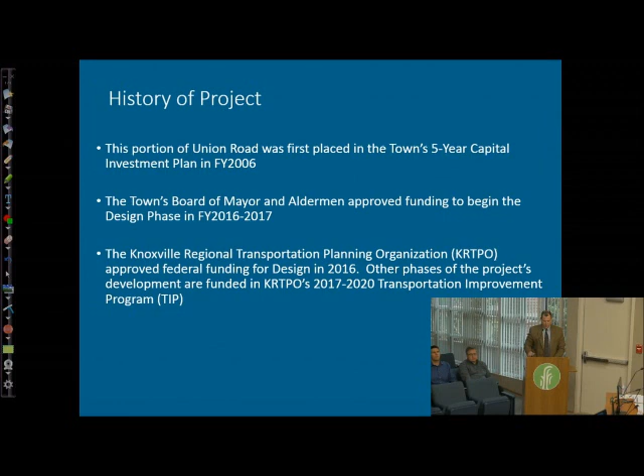Back in 2016-17 with engineering, we were able to get grant funding through the state of Tennessee and the Transportation Planning Organization, where we have an 80-20 split on the money that we get. That was a real benefit to help us afford this project going forward. The project runs from Everett Road all the way down to Hobbs Road along Union, and then down to Kingston Pike, almost 4,400 feet of improvements to the roadway.

We have a few pictures to show the current conditions of Union Road. This is roughly a 15-foot wide road throughout this entire area, and there is no pedestrian access or facilities along the roadway.

So why did we need to improve it? We know that the volumes of traffic along this road are going to be far greater than they are today. We've got a couple of developments going on right along this stretch of roadway, and we needed to try to get the improvements done as concurrently as we could with those developments.

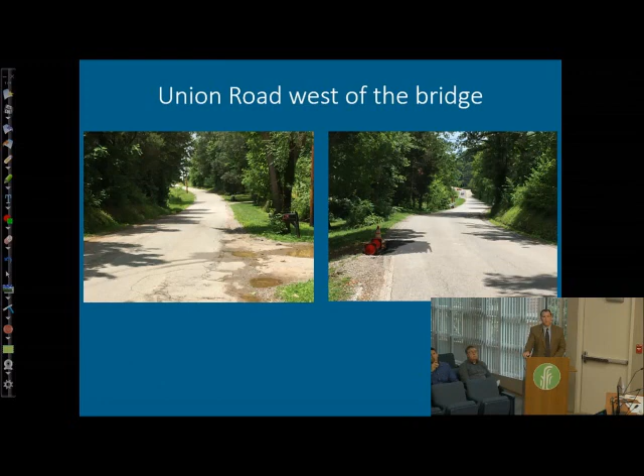When we first start looking at projects and how we're going to design them, we look at several different manuals, guides, and things that we have as a town, as well as things that the state of Tennessee requires. We have to marry all those things together and work through the guidelines to make sure that when we improve roads, it's not just for motorists, but also for pedestrians and bicyclists.

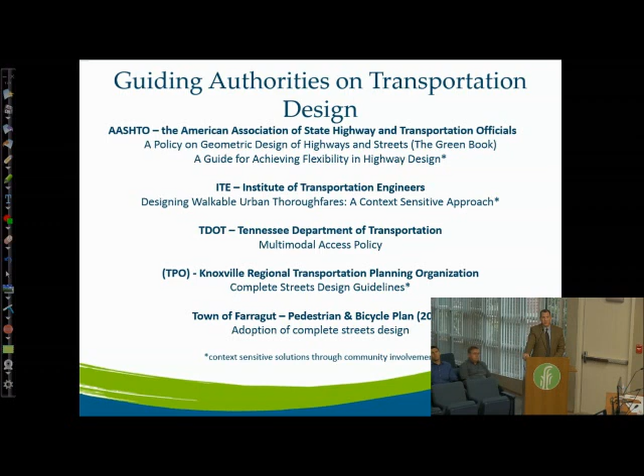The town has had a long-standing policy dating back to 1997 with the pedestrian circulation plan, where we try to put trails in with road improvements. Then back in 2010, with the bicycle and pedestrian plan, we also included complete streets—you'll hear a lot about complete streets from different organizations. Basically, that means we not just have roads, but also multimodal access, so people walking, running, or biking can get through the same area.

One of the most recent projects that meets this multimodal design approach is Old Stage Road, from Watt Road going down to where it extends further into Old Stage toward the Fort West subdivision. That project had not only wider roads with 12-foot lanes, but also 4-foot bike lanes and 5-foot sidewalks on both sides, allowing for multimodal transportation along that section of corridor.

One of the things we wanted to do early on was talk to residents about what they wanted to see for this corridor. We had a first meeting back in March of 2017 with residents in the area to get some feedback. One thing we heard was that they didn't want a highway or a speed zone out there—they wanted to try to slow traffic down if at all possible. So how could we design things to slow traffic down?

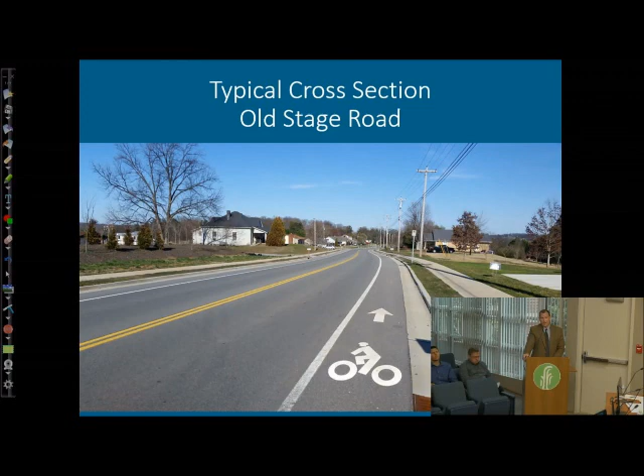One of the first things we did was request design exceptions from the Tennessee Department of Transportation in order to try to do just that. One of those design exceptions was to add roundabouts, if possible, in the design. The other was to get a design speed lower than what they would typically allow, down to 30 miles an hour. They were agreeable to both of those things.

Originally, back in November of last year, we had designed three roundabouts along this corridor at various entrances to the subdivisions. After public comment over about a 3 or 4 week period, we realized that the two entrances at the current subdivisions of Fox Run and Saddle Ridge were not desirable or wanted by those residents. So we were able to take those out and make it more of a regular road-widening type of project, but we did keep the roundabout at the new entrance to where the future Ivy subdivision is going to be.

One of the things we needed to do to allow for the multimodal aspect is put a trail or multimodal path on one side of the road. We were looking at a 10-foot trail on the north side of the road along the entire stretch. There's also a grass strip we're trying to have—town standards are 6 feet, but we're looking to adjust that and make it wider where possible so street trees can be planted and hopefully live longer. With a wider grass strip, we think more of these trees will survive long term and grow into nice specimens someday.

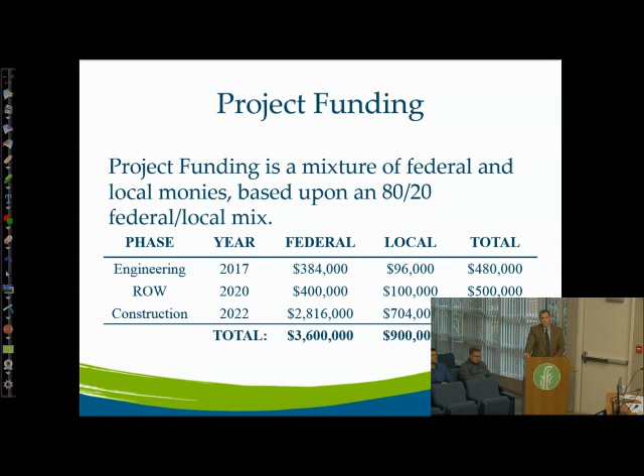For the project timeline, we're in the engineering phase right now, technically in what's called the NEPA phase, an environmental review phase. NEPA takes quite a bit of time—about 36 months start to finish—and we're a little over halfway through that point right now. About a year from now, once we get approval from all the bodies, not only Planning Commission but TDOT, we can start final design and eventually start buying right-of-way. Once all the right-of-way and easements are purchased, construction will take 14 to 18 months. That gives you a broad timeline of when we think these things could be done.

Tonight, what we're looking for is really the MPC's direction on any changes you'd like to see, or any adjustments or tweaks to the project. We feel like everything you're going to see in the plans tonight meets TDOT's expectations of what we need.

There is one thing we're slightly concerned about: some sections of the trail and multimodal path are going to be right up against the roadway. TDOT came out back in February with a more detailed multimodal transportation plan guide. One of the things they talk about is that if you have a trail next to the road, it may require a barrier of some kind. What we're trying to avoid, if at all possible, is any kind of guardrail or concrete barrier along that roadway. That may be something we have to look into and try to get with them on to see what the possibilities may be.

So with that, I will end my presentation, and we'll be happy to answer questions later. Thank you.

Darrell, do you have anything at this time? I really have nothing to add unless you have questions. Okay.

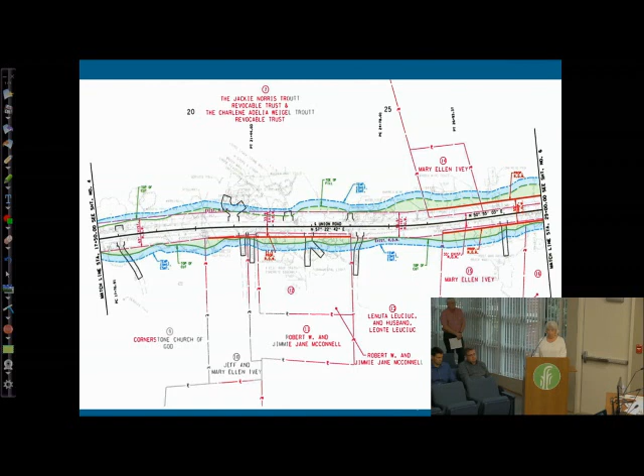The town's goals can be met without the extreme design. Every existing property owner that chose to live, buy, or build here around Union Road did so for their own personal reasons. While we appreciate the town's vision for new, undeveloped land, the existing property owners impacted that have lived here and made a living here, including my husband and I, even before there was a town of Farragut, have rights and wishes that need to be considered.

The town represents them also and needs to advocate for their rights and keep the impact as minimum as possible in their future development and visions. Future development and visions need to be balanced and respect shown to the current property owners. A lot of people chose to live on or off of Union Road because they loved the area as it is, not for future visions. Thank you.

Okay, Tim Sayers. Good evening. Tim Sayers, 12812 Pecos Road. I'm here for 2 reasons about Union Road. One is my own personal interest, and the other is to help support our neighbors, the Trouts, who have been wonderful neighbors to Saddle Ridge neighborhood, and I think we owe our support to them for that.

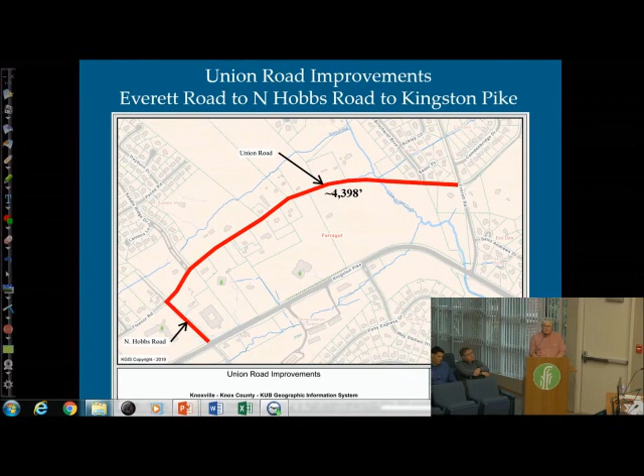I'd also like to ask that you look at the design of the multi-purpose path as it runs in front of the Fox Run neighborhood, particularly right in front of the corner property, the Blatts that live on the corner there. As that path runs along the road, it does run right next to the road right at the entrance. I'd like to see us make sure that path stays along the road until we get to the corner stake, the back left corner stake of the Blatts property. Otherwise, that multi-purpose path and the grassy strip or whatever will be right up against their fence line or their property line, allowing people walking along that strip to look right into their backyard.

So if you could keep that thing tucked in a little closer to the road, for just maybe 10 or 15, 20 feet more, whatever it takes to get to that corner stake, and then you can gradually move back out.

Also, I'd like to mention that in the response to the comments that were made, there was some discussion about stop signs, and I'm still not clear as to what the vehicle count is and what the requirements are for stop signs.

I'm definitely concerned at the entrance of Fox Run, if the vehicle count is going to increase like it's projected, that in the very near future, perhaps right at the end of that project, we're going to be needing a three-way stop at that entrance. So I would like more detail on what qualifies for a three-way stop there.

Certainly they're effective, somewhat effective, on Smith Road, in at least slowing people down. I've seen people run through those stop signs as well, but at least they slow down. So there's definitely some benefit there.

The last thing I want to mention is I would appreciate if the town, when the construction is going on, would work with the HOA board, which I'm a member of at Fox Run, because we want that island that is now designed in the front to be plantable, not concrete, with low bushes or hedges. Perhaps our board would consider allowing an irrigation line to run across or under the road from our irrigation system that's right there, so that we can keep that plantable island in front of the entrance of Fox Run irrigated, so those bushes can survive.

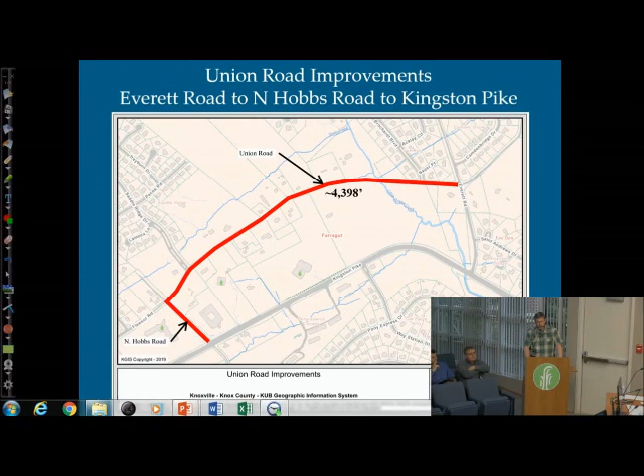And I would challenge any of you to go out and wonder why no one walks on Everett Road. If you would go out there and walk on Everett Road, it's often 50, 60 miles an hour. And so if that's your plan for Union Road, no one wants it. No one wants an interstate running through the country. No one does. So there's much more work to be done

on these design plans. So I have a specific question for the town administrators and the engineers as to how they determine that Union Road is a major collector road versus being a local rural road, because those design requirements are very different if you look at it as a major collector, as opposed to local rural traffic.

And if I can, Mr. Whiting, it'd be great, we could get you a cup of coffee. This is an important meeting. I've had many sleepless nights. I would appreciate it, as I'm sure everyone else would, if you could stay awake and listen to our comments. It's important. So I'm finished. Thank you.

Okay, then Melissa Bowles. Melissa Bowles, live at 12608 Union Road, which is right on the very corner of Everett and Union.

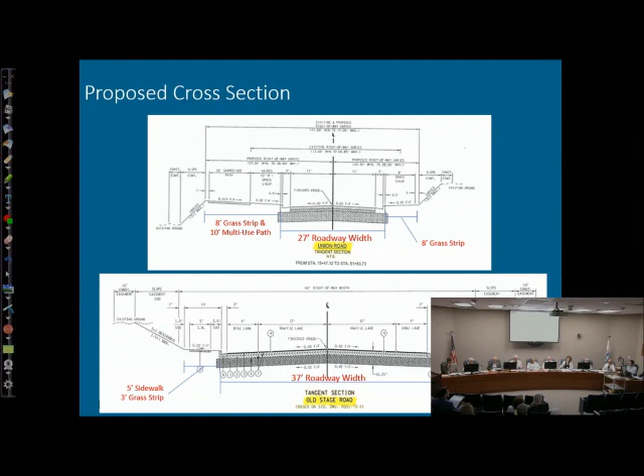Well, that's important to me because I've heard residents mention several times their aversion to not wanting Everett Road. So I'm trying to get in my mind, and it sounds like, especially if we put trees along an 8-foot border, we would not be duplicating Everett Road. We're kind of in a spot here because I've heard folks say we want more trees, then I heard somebody say we don't want to plant trees on an 8-foot strip. So I guess I'm in favor of the trees too, and I think that would shrink the footprint a little bit visually, mentally.

And help reduce speed, I think. If you see that border of trees a little closer, you're not out on the highway, you know. I think what we've heard on so many of our other projects is that visual ocean of asphalt. If you look at Old Stage Road with the bike lanes and sidewalks, it's a very wide footprint. And I think this one, with the 8-foot grass strip and street trees through there, it will really break it up, and it will retain a much better feel.

One of the speakers talked about our proposal for tree planting. Is that in the budget for now? We maintain a fund for the planting of trees. I mean, we have tree planting, I guess, every November, December.

It will not be done as part of the project, but we can commit that it will be done shortly after, not 6 years after. But you need to do it in the winter - there are some things that you need to consider. If the project is completed in, say, March, April, May, June, something like that, we're going to wait till November to plant anything.

Do you have other questions? We're looking for the map that we had up with all the colors on it. It probably doesn't have the detail that he's looking for. We have them here, section by section, with the present and proposed layouts. Mark, does that show enough detail on the western half? No. Can you go forward, Mark? Let me see here.

That is the present layout at the beginning. Hobbs Road is going to the south, the westernmost point. That is the proposed layout in front of Saddle Ridge and Hobbs Road. Mark, you want to show that crosswalk next to Saddle Ridge? The facilities on the south side there, near Trout's property. Let me highlight this. Basically Hobbs is here, and Union comes into it perpendicular. The walking trail is on the south side of the road, and then it crosses over just east of Saddle Ridge Drive, and then it is on the north side of Union Road from that point east.

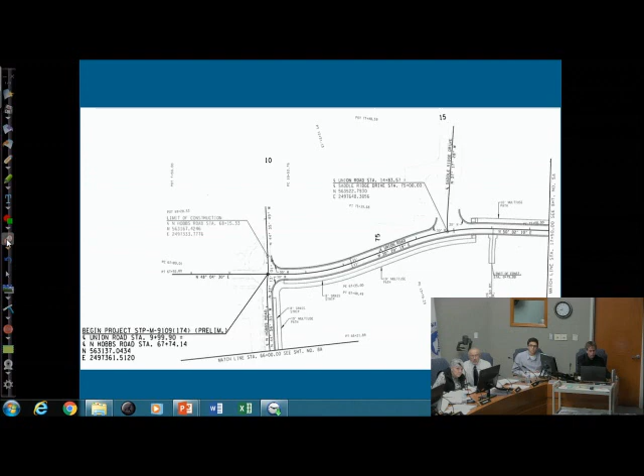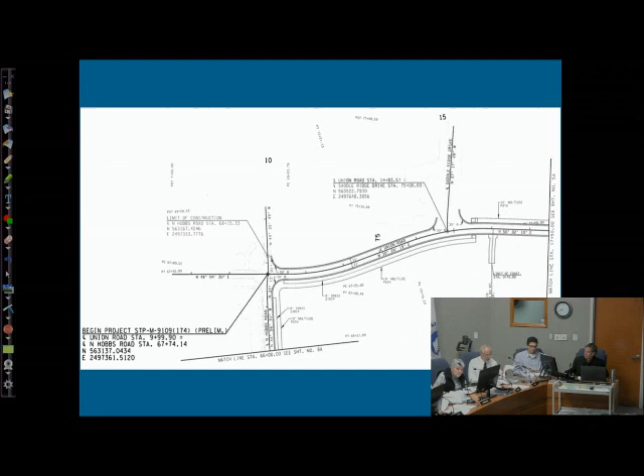Now, that is a mid-block crossing. I'm not really crazy about mid-block crossings, but it's probably at a location with less activity than what's going to be going on at the intersection of Hobbs and Union. That would be a mid-block crossing too, more or less. The way it operates right now, it's a through movement. There's not a stop there.

So then, let's see, you can see there, that is in front of the Trout residence. We've pushed the path right up to the back of curb in order to accommodate as best we can, but that may or may not be approved. If they say we have to have a barrier, you'll still have to have a grass strip, right? Well, I don't think we would have to have a grass strip at that point. The problem is a barrier is going to take up about the same amount of space as 2.5 feet of grass. To me, a barrier is a deal killer, that would look like an interstate. That would really be ugly in my mind.

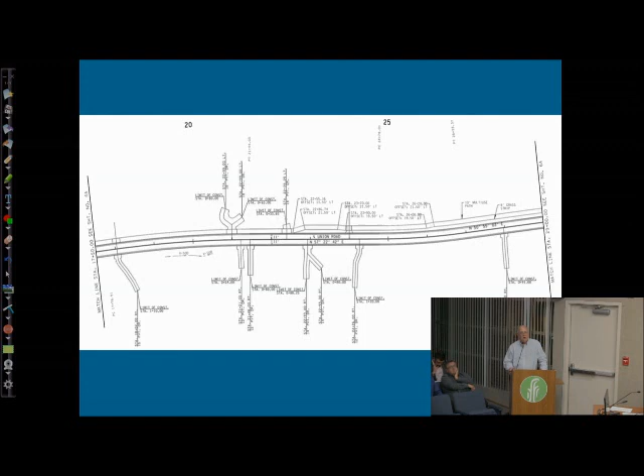Are there other sections where it would be against the road, or just by the one road? There's one near the Dean residence, yeah, there's one by the roundabout right there. In that location, there is a stream running parallel to Union Road, and they're trying to stay out of the stream. Would that be considered severe constraint? That's debatable, I think. The 30-mile-per-hour design speed may allow us a little bit of leniency on the minimum 5-foot clearance, but it's still a question mark.

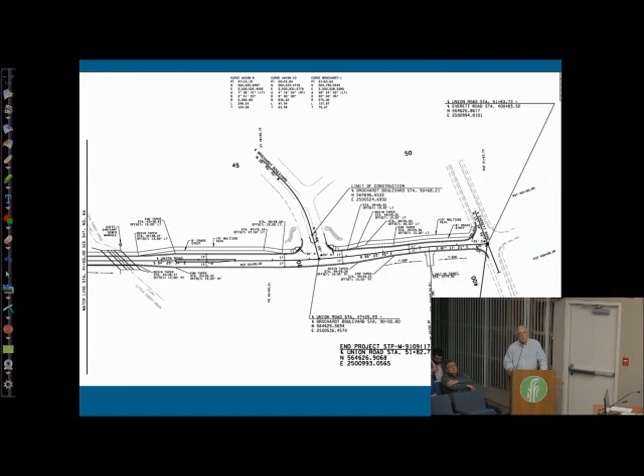I'm sorry, I was reading about some other bridge questions. Are you going to require, because it's a bridge, a barrier between the pedestrian facility and the road? We're going to go back and look through some of the areas where we set the trail against the road. We did it in areas like the Trout property because we were trying to limit impacts. We did it across the box simply to keep the box narrow.

The longer the box, the more expensive it gets. As far as TDEC is concerned, there's a minimum length you can have a box before you start incurring costs. Just for clarification, he's referring to a box, what the rest of us would call a bridge. A box bridge, sorry.

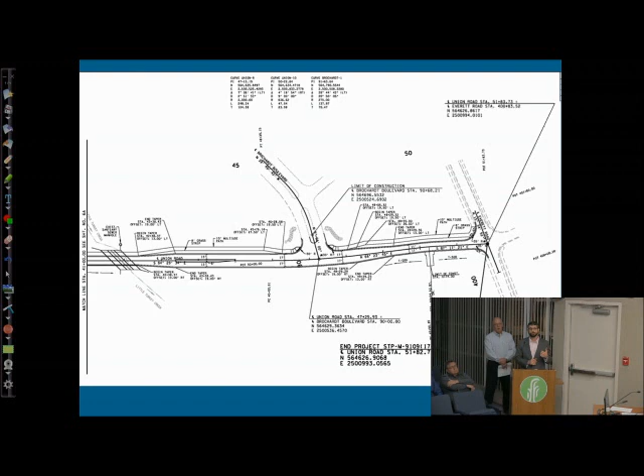The area to the west, there is a known stream there, so we're doing our best to stay out of that. I don't know that it would be considered an extreme constraint, it's more just an environmental consideration to save money for the town. Generally that costs money when you take a stream, you need to give one back, basically.

So would that also be a NEPA concern? Yes. So part of some of these areas was simply to lessen impact, lessen cost, and get through the NEPA process.

Now, to your question, we're going to have to revisit some of those areas. We're doing the best we can, and we left some areas like that where we felt like we had some argument to be made.

But since the beginning of the development of these plans, new guidelines that are a lot more specific have come out, and they're more stringent than when we originally did some of these things.

Are we grandfathered under the old guidelines, or do we still have to fall under the new guidelines? No grandfathering, but we left these in as an attempt to limit impacts because we felt we had some argument to make. But that doesn't guarantee that they will stay the way they are.

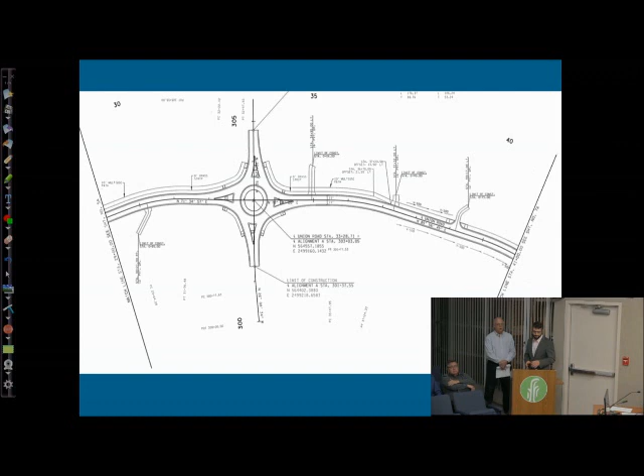Jimmy answered that, but because I did find the email, Daryl, do you have...

Any indication at this point of timing of getting all of this to the state, or is that something we're still working on? Well, that's a leading question there.

As far as getting this submitted to the state for NEPA approval, I think if revisions are minor and we can bring this back to the Planning Commission in May and you guys are okay with everything, they can wind it up and submit shortly after that.

Again, Lee, if you want to cover the length of time for NEPA approval. I would echo that, depending on the need for revisions. We're in a place as far as our environmental documentation that if we could wrap these plans up, I don't know the exact time, but probably within a month we could have it submitted to TDOT, if you're talking about NEPA approval.

Thank you. All right, anything else? Anything else? One more question.

Question about Ivy Road where it connects with Way Station at Kingston Pike. Tonight, I believe, is the first I had heard that the traffic signal was not going to be part of that road when it was connected to Kingston Pike. And now I'm hearing that Ivy Farm has to be developed, Swan Farm has to be developed, then you have to go to the state, do a traffic study, then go to the state and ask for a traffic light. Can someone give an idea, from the time Swan Farm would be fully developed, how long after that we might expect a traffic light to potentially go in there?

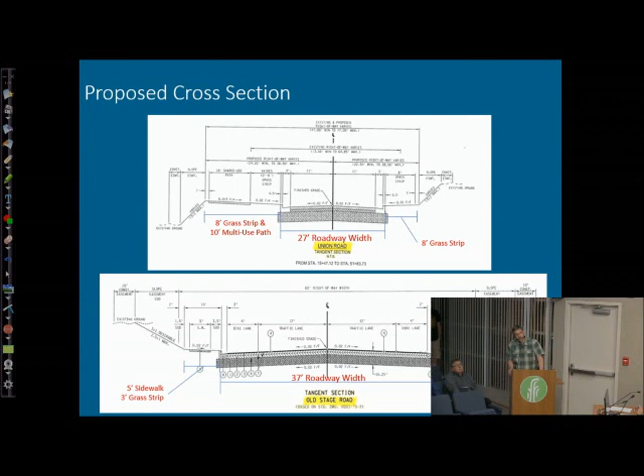Okay, so we are about halfway through the engineering phase. And if we're not considering a traffic light at Ivy Road, and construction starts in 2021, how many years do we have to be late getting our children to school, getting to church, while we're waiting for people traveling this road after 2022? How many years do we have to be inconvenienced? And I'm not asking a rhetorical question. I'd like to know. It's going to be 4 years, it'll be 2026, or it'll be 2024. I'm serious about it. How many years do we have to be inconvenienced? And not just these people out here, but those people up there, and your families too. It's a fair question to wonder how long we're going to be pushed.

Is that okay? Yeah, sure. Thank you.

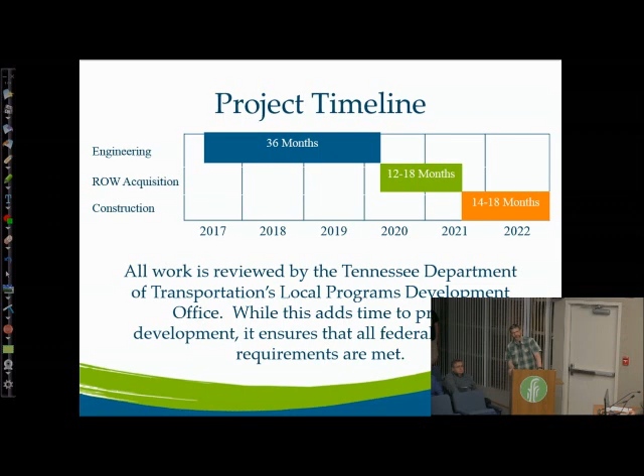We have approved the mass grading for the Swan Farm property. I think one of the developers is here tonight, but that's something they'll start. That house has to be removed. They're going to be putting the road in. All that's going to be done. They've got townhomes going in on the backside there. Once that's mass graded, I'm pretty sure that developer, Travis and that group, will be looking at some sort of plan to get commercial property in there, because that's a big piece of just open land. Chances are pretty good that you're going to have commercial property there pretty quick once it's mass graded and people start looking at it and start trying to push the development area. I think Noah had some stuff going on there once before, and there was quite a bit of interest then, and I think there'll be quite a bit of interest in the future. It looks like that's going to be, like what Vice Mayor Povlin said, an activity hub. I think the commercial property will start there pretty quick, and the quicker it's there, the quicker we can get good traffic counts.

But it is ultimately completely dependent upon the developer of that farm and how quickly he can move with the commercial development and attract tenants. So conceivably, my best guess is it's going to occur before Union Road's construction is complete. But it's possible if we hit another recession and he can't lease his commercial space, he can't create the warrants necessary to get TDOT to give their stamp of approval for a light. So there's not going to be a simple answer to your question. I wish there was, but it's completely dependent upon the commercial development.

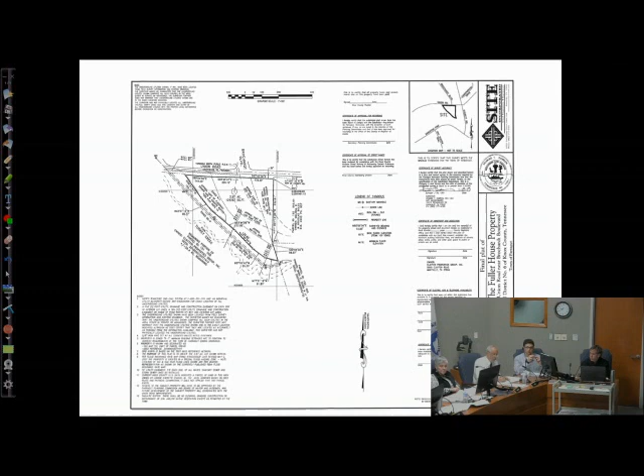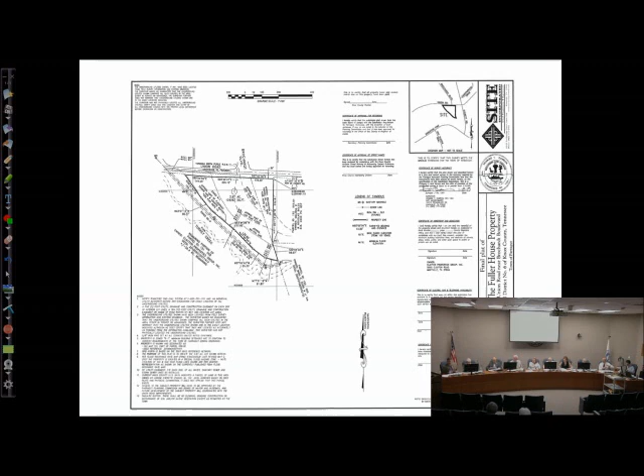Does anybody on the Planning Commission have any questions for the applicant? Annette, you and your applicant's thoughts about the sidewalk one way or the other? I guess what I'm kind of hinting at is if you don't want the sidewalk, we probably officially need you to make a request for a variance. Yeah, I'd like to request that we have a variance granted to remove the sidewalk requirement from the south side of Union Road along their property frontage. Which is pretty typical of what we've done with some other very simple subdivisions, especially 1 or 2 lot subdivisions in the past. And I think you're also hearing that based upon the plans on Union Road, your sidewalk doesn't make any sense there anyway. Right.

You will have to take action on that before we take action on the plat. Have you gotten far enough to envision how the house would sit on that site, facing which way? I don't have that information.

Are there restrictions on where you can put the house based on that 100-year floodplain line there? Do you have to keep above that, or how's that work? Is it 2 feet or 4 feet above? 4 feet's our freeboard. The finished floor elevation has to be 4 feet above the base flood elevation in the 100-year. That's our freeboard. Our level of measure of safety is 4 feet.

With the crawl space above elevation, that would not be difficult to do. Yes, that's right. Okay, looks like that lot's getting smaller and smaller to build on. It'll have to be at the corner. Yeah, a lot of it is, like I said earlier, in the floodplain.

The other thing that I'd like to note as an observation to the applicant: you've got a lot of road frontage there. Might be a good candidate for a circle driveway instead of trying to have one access point tying in directly across from Brochardt. I would not want to see them have to back out onto Union, so they're going to need plenty of room. And like I said, you've got tons of road frontage.

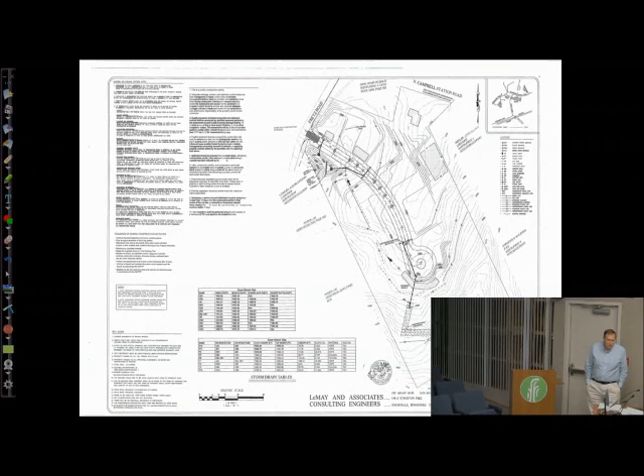The rest of that road isn't picking up the entire road—the rest of the hill is about 150 feet uphill from that basin. So it's probably right in here somewhere? Correct, it's the high point of the road.

Any more questions or comments?

I'm going to make a motion for a variance. First, let me ask, are you okay with all these subject-twos? I am great with everything, and it's been a pleasure being here with you guys this long—I've enjoyed it. That's on the plat.

Okay, we're ready for our motion. I'm going to make a motion for a variance from subdivision regulations for maximum length of cul-de-sac of 500 feet, due to the shape of the property, the topographical issues to the south, and the proximity to the intersection of Fretz Road and North Campbell Station Road. Second. All those in favor? Aye. Opposed?

The second variance deals with the width of the street. It's a local street, so the minimum width normally would be 26 feet. They're requesting a 24-foot wide street due to the short length of the street and the number of dwelling units that would be accessing it. Staff does support that reduction—it provides enough on-street parking should that become necessary, and given that short of a street, 24 feet should accommodate the needs there.

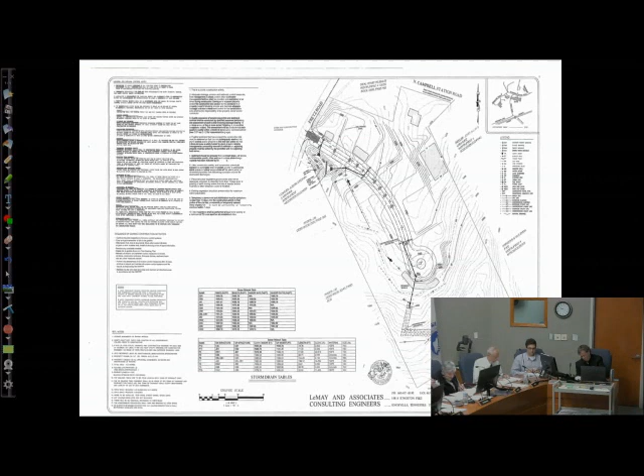Move for approval of the variance from the width of the street, from the required 26 feet to the proposed width of 24 feet, due to the short length of the street and the number of dwelling units associated with this subdivision. Second. All those in favor, say aye. Aye. Opposed?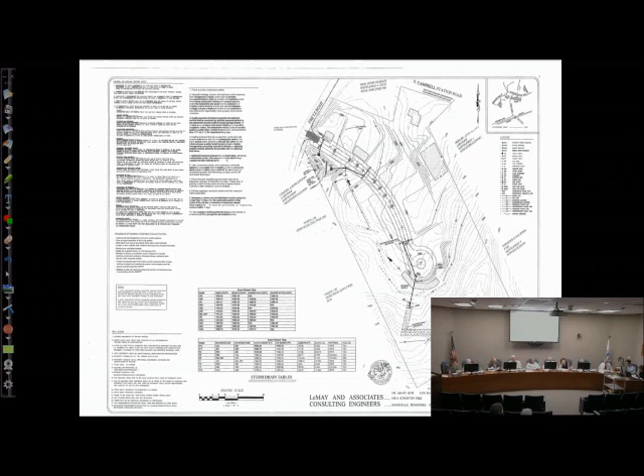The third variance is from the requirement to have more than one access into and out of the property. As mentioned earlier, the best portion of the property—as far as environmental and tree quality—is on the south end, which limits your connection options. The county is to the west and southwest, and there are topographic issues to the east. Providing another access to Campbell Station Road isn't particularly helpful since it's very close to that intersection, and there are less than 30 house lots proposed. For all those reasons, staff would also support this variance request.

Mark, when we adopted that in the last year or so, I thought we automatically exempted developments with less than 30 lots. No, it's just one of the criteria we could consider. Oh, that was a criteria, not an automatic exemption. Right, okay.

I'm going to move for a variance from the requirement for more than one access into and out of the development, due to topographic issues, the shape of the property, and its proximity to the intersection of Fretz Road and North Campbell Station Road. The development will also have less than 30 houses. Second. All those in favor? Aye. Opposed? Thank you for staying with us.

Now the preliminary plat itself. It's always fun, you know that. One never ends.

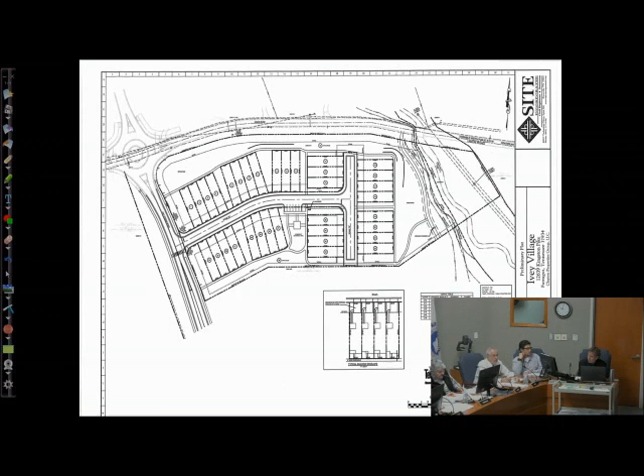This item was talked about last month as a workshop item. We went through some things for you to consider in the design and the transitional aspect of this portion of the Swan property. This is the north portion of the Swan Farm property that abuts Union Road. The property is zoned neighborhood convenience commercial, and they're using single-family attached development as their transitional element, which is an option in that zoning district. So we feel that it is a good land use to transition from the non-residential that will occur to the south to the lower density residential on the north side of Union Road.

This particular design is a little bit unique. We talked about it last time in that the actual front of the houses will face outward and not toward the street. The streets will be public streets, but they will function more visually and functionally, frankly, as more like an alley, and that will come back to the variances that they're requesting for this item.

So the front of the houses will face toward Union Road and to the south toward the non-residential development. So it's a little bit unique, and then they'll have the pedestrian facility that would otherwise be required along Union Road. It will be separated back into the development. I think Annette has increased the distance between the sidewalk and the house lots slightly to give it a little bit more of a community sidewalk facility feel rather than a sidewalk that's more of a private facility just for the benefit of the people that live in the Ivey Village development.

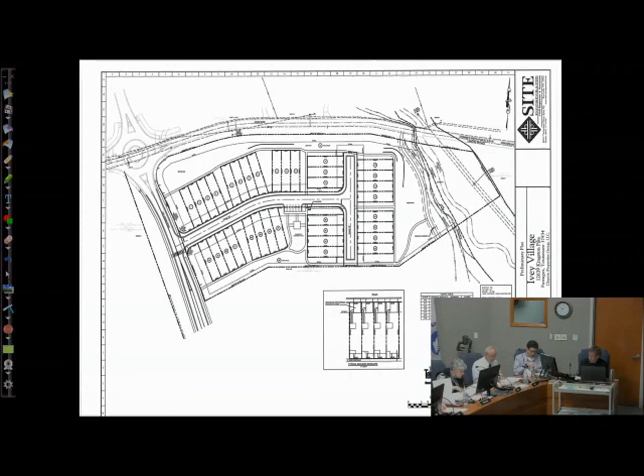Again, there's a couple of variances being requested here, and the first one deals with the width of the street, both Street A and B. A is the long street that comes down to Ivy Farms Road, and B is the one that comes in perpendicular that will ultimately extend to the south. This is kind of conceptual of what the street system and pedestrian facility system would look like on the full Swan development, because we don't really know how the land area within those spaces is going to be developed. So we do know roughly how the infrastructure is going to look. So that's what it would look like, with Street B extending on down to the south.

They're requesting a variance from the street width of 26 feet to 22 feet. Again, the main reason for that is they're short street sections, particularly Road A, but they're also trying in their design to create the effect of it being more of an alley than a public street, to narrow that down and give it that more alley type look and feel.

They're also proposing—we met with the applicant's engineer and Annette—a couple of raised crosswalks to kind of lessen the desire of people to use Road A and B as a cut-through, or a way to get from the commercial development over to Ivy Farms Road coming through the residential portion. Those will be where I circled those areas; there'll be raised crosswalks there. That raised crosswalk to the south will also act as a transitional infrastructure piece to delineate where you're leaving the non-residential and entering the residential. That was one of our comments on the plan itself, to maybe beef up the landscaping in that transition between the two to give it some separation.

Mark, the front part of the south side of this, where they're proposing the commercial—is that just a proposal right now? That's not necessarily... are you guys building these, or is this just an idea of what you might do?

The road alignment on that bottom piece of property might change a little bit, but that's probably pretty close. We do intend to bring Road B down into the commercial development. They had shown some hypothetical development there, but we didn't want to imply that we'd be okay with it, so we asked them to just show the infrastructure and how things will be connected generally.

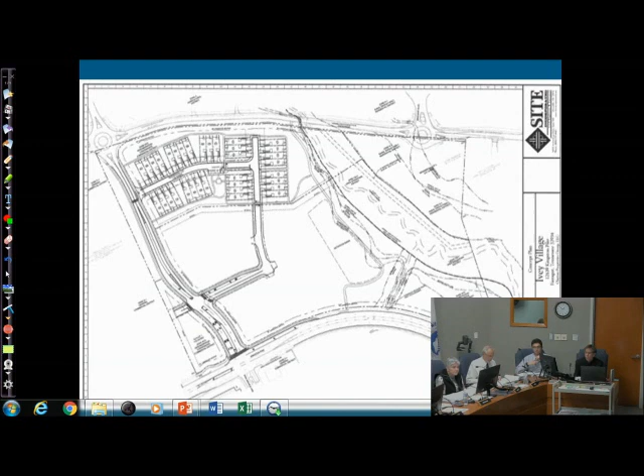And Ed, I'm assuming the garages to these places would face the alley? Yes. How much driveway is there between the garage door and the alley? At least 20 feet, so you can park a car without it hanging in the back. So there's room to park 2 cars in the driveway, plus the 2-car garage. They'll have to back out into the road, though.

Yes, and you're using pavers for the driveways? We have to provide 25% low-impact development on the site, and one of our proposals was to do the driveways with pervious pavers.

And your detention will be at the regional detention pond? We'll use the regional detention pond, and we've also proposed on the northwest corner, right at the intersection of Union Road and Ivy Farms Road, a bio-detention basin that we'll landscape nicely. That will handle some of the roof water and catch some of that runoff from the uphill side.

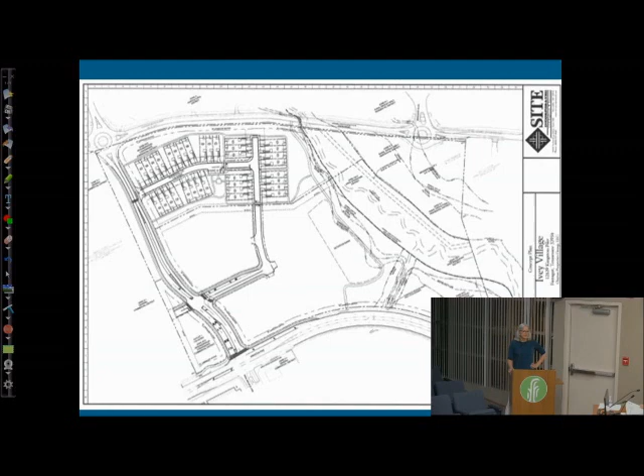Didn't we talk last time about access to the mailboxes, and the amount of parking space there? Yes, that's marked. They originally had 2 parallel spaces, but we went to 90-degree head-in parking spaces and got a couple extras, so now there are 6 spaces. Yeah, that helps.

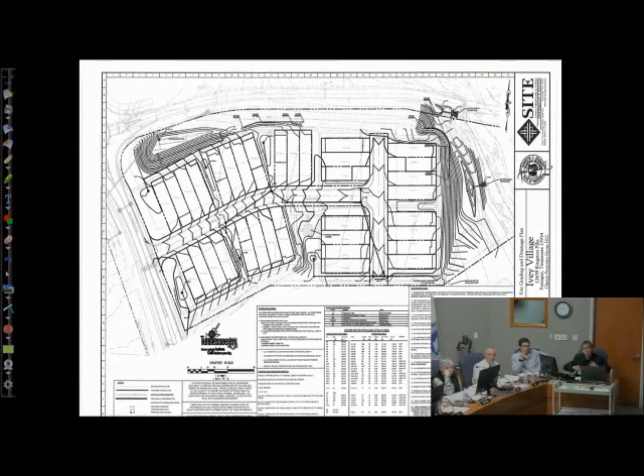Okay, all right. I have a question. You do? Okay, or maybe a comment. Let's have your name again, just in case. Oh, I'm sorry — Mike Rothman, 659 Burchard Boulevard, Knoxville, Tennessee, 37934.

Thank you. What is the size of these dwellings, how many square feet? I don't know exactly what the square footage is, I'm just going from memory — 2,500 to 3,500 square feet, and they're 2-story. And what's the price range? From memory again, don't hold me to this, but I'm thinking 400 to 500, somewhere in there.

Does anybody recall? I know it was mentioned as higher than what they were talking about across the street. Is that correct information? We don't get into prices, we can't speak for that. We talked about it a couple of times. Okay, it's not going to be a long discussion then.

My only comment, which I've made before, is please put a lot of trees along the border of Union Road. I don't want to sound like a broken record, but I looked at the plat for Ivy Farms and that clearing showed a lot of trees, yet I now understand the developer isn't putting trees up there. I just want the town to hold the developer's feet to the fire to put trees up — it's a great buffer and makes the community look good. That's all. I'm sure this is going to be very nice. Maybe it'll be a retirement community.

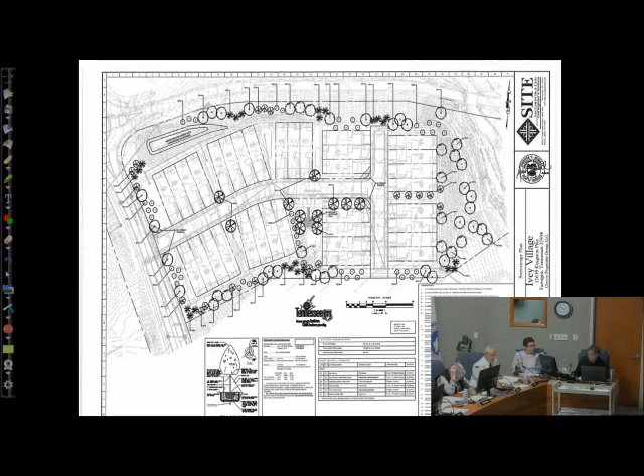Ned, this is your opportunity to address any concerns or questions with the subject-tos. Are you comfortable with all of these? Yeah, okay, we do not intend, however, number 13, to have street lighting. Well, that's not a requirement of the town. It's just that if you do have street lighting, we have some parameters you've got to follow. We could take that one out if you're okay not having it. So we could strike 13. Everything else we're good with.

Item number 6, the applicants are requesting, excuse me, a setback variance for lot 12. Is that an issue or not? Hold on, what number are we on? My number 6 has to do with landscaping, I'm on the wrong one. I'm looking at the most recent staff recommendations from today, which is different from the one in the packages. That was one of the comments staff had earlier, but it's already been addressed. That's been resolved, we worked that issue out. They don't need a variance on the building. That was my question, has that been resolved? Yes, they've resolved that with modifying their design.

I kind of like this. I think it's a novel idea, having the alley access with the front doors facing other directions. I'm not sure we have anything in the town done like this. I've seen some things in Nashville done like that. Is it like Wentworth? It has an alley-like access to the garages, doesn't it? Some of the units do. Like Park Place? No, with Wentworth you're still looking at the back of them from Kingston Pike. This one, if you're driving on Union Road, you'll see the fronts of the houses, it'll be really nice looking. I think it's a nice way to address it, especially driving down Union Road, you're going to see a nice elevation instead of just the back of somebody's house and garbage cans.

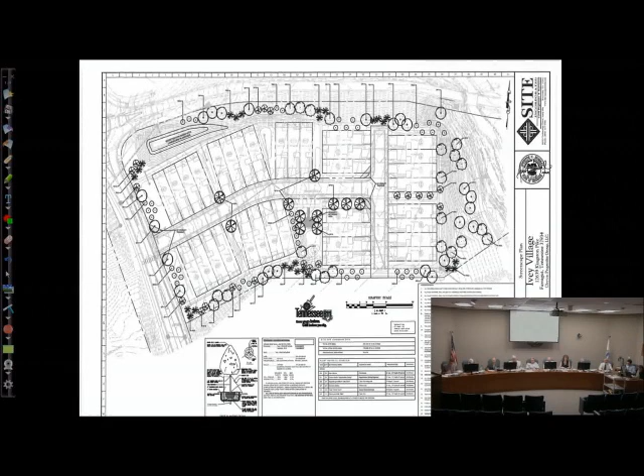Move for approval for the preliminary plat of Ivey Village per the amended subject-tos. Second. All those in favor? Aye. Opposed? Thank you, thank you.

Now we have item number 8, discussion and public hearing on a resolution to approve proposed amendments to the future land use map and the comprehensive land use plan updated 2012, recommended by the Comprehensive Land Use Plan Steering Committee related to Outlet Drive and Snyder Road, Town of Farragut applicant. We talked about this last month as a workshop item. The big changes on both of these are basically converting some areas that were designated as office light industrial to regional commercial, and also cleaning up some land use designations to reflect actual uses that have either been constructed, are under construction, or physical conditions known to exist on each of these corridors, making the land use map reflect those.

And then also there was a couple of office and light industrial land uses that would have accessed a section of Snyder Road and North Campbell Station Road that really, in neither case, were appropriate for non-residential development, given the characteristics of the streets. So those are the changes on Exhibits A and B, and the staff recommends approval of Resolution PC-19-03.

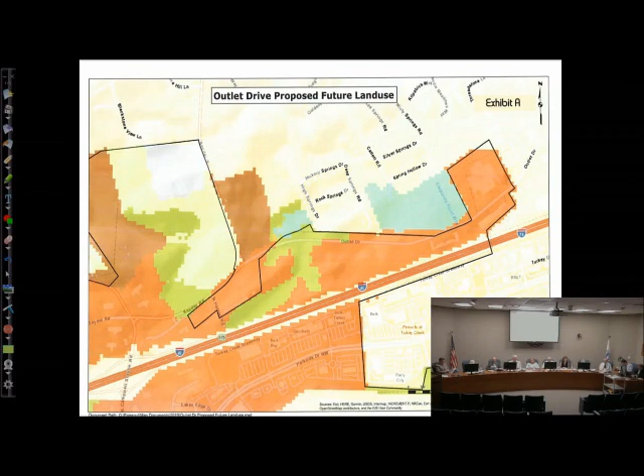Aye. Opposed? Item number 9, discussion and public hearing on proposed amendments to the Farragut zoning ordinance to remove reference to elderly and group housing and clustered housing units, since the terms are no longer used in the ordinance.

Town of Farragut applicant. This is another item we talked about last month as a workshop. This is just cleaning up some language that is no longer relevant in our zoning ordinance due to some amendments that we made, mainly dealing with assisted living facilities a couple of years ago. So the staff recommends approval of ordinance 19-19 through resolution 19-04.

Anybody have any questions on this? None. For approval of resolution PC-19-04, which recommends approval of ordinance 19-19. Second. All those in favor? Aye. Opposed? Item number 10, discussion and proposed amendments to the Farragut zoning ordinance relating to short-term rentals.

Town of Farragut applicant, for discussion purposes only. As you all know, this is a topic we've heard more about in the last few years. In fact, the state of Tennessee adopted an act in May of last year to deal with short-term rentals. It was discussed at the Board of Mayor and Aldermen's strategic planning retreat in January, and the board members wanted basically to get on top of this and to not provide for short-term rentals in this community. So that was the direction the staff has been pursuing.